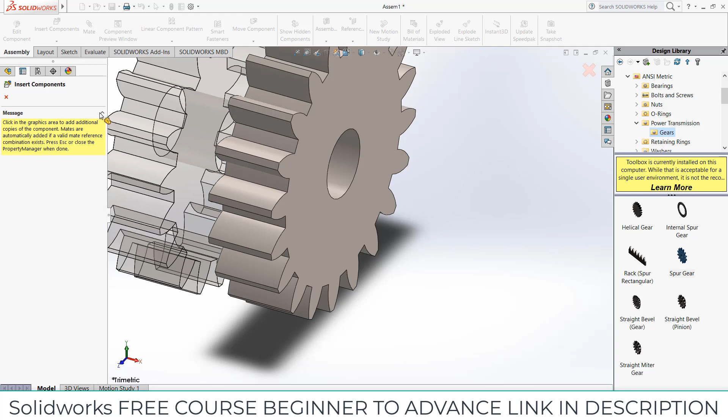Select this face, press Ctrl plus 8. Now go to sketch, click on convert entities. Select this line as well, click on convert entities. Now press Ctrl plus A, press Ctrl plus C to copy it.

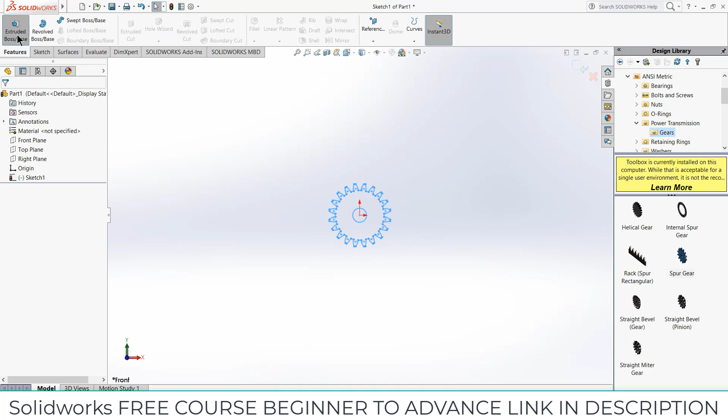Now click OK, go here, new part, OK. Select the front plane, click on sketch, press Ctrl plus V to paste the sketch. Now go to features, click on extrude mid plane. Now increase the distance as per your requirement. In my case, it is going to be 80mm.

Let's say 150 is much better. Click OK. Now press Ctrl plus S and save it as gear.

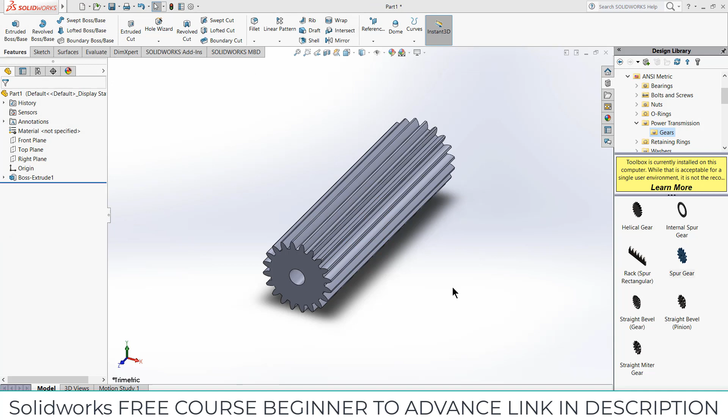A question might arise in your mind, why I'm not using this gear. The reason is that whenever I use it, mostly I ruin these libraries, so I don't want to ruin this library. That is the reason I'm not using it.

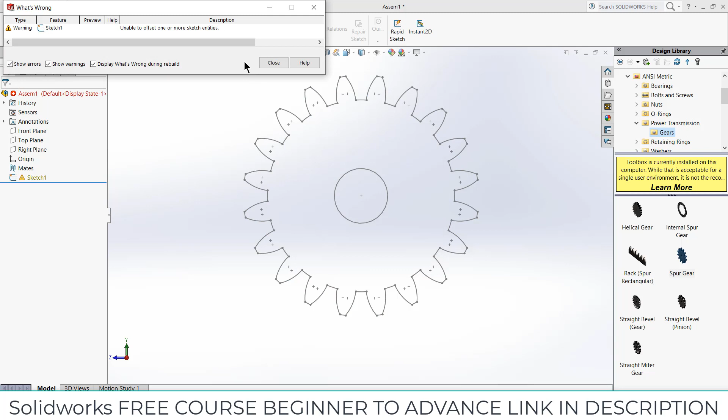So exit the sketch mode, right click on this, click on delete, yes, or close. Right click on this part, click yes, and close. Now similarly import the rack.

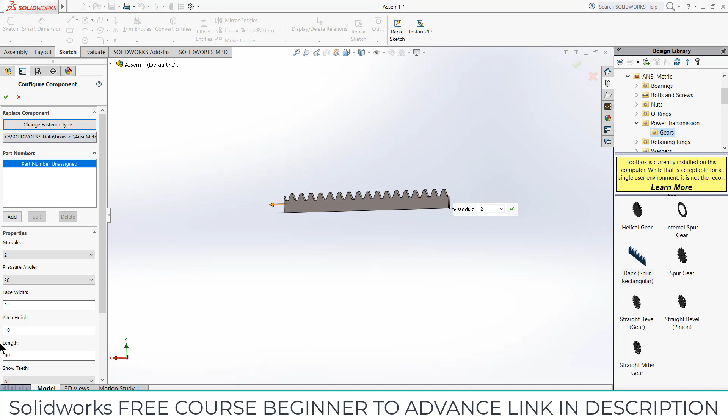Make sure that the module is 2 and its length is quite big. So let's first decrease its length. Basically I want it to 30, let's say 80mm, or 90mm is safe, fully safe for me.

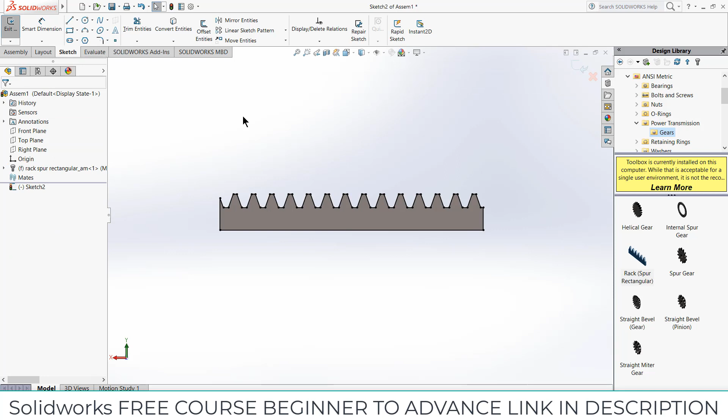Click OK. After that, first thing we have to do is select this face, press Ctrl plus 8, go to sketch, click on convert entities, select this face, click on convert entities, press Ctrl A, press Ctrl C, click yes.

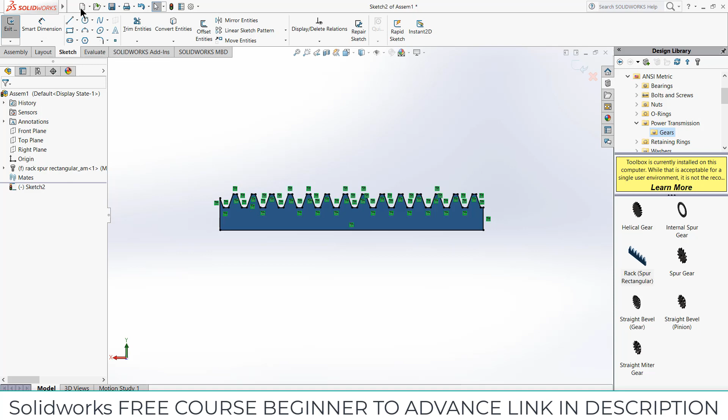And now click OK. Go to here, part, click OK. Select the front plane, click on sketch, press Ctrl plus V, go to features, extrude up to 10mm, click OK.

Now select this face, click on sketch, press Ctrl plus 8. We need to draw some two circles here, and the distance between them is 80mm.

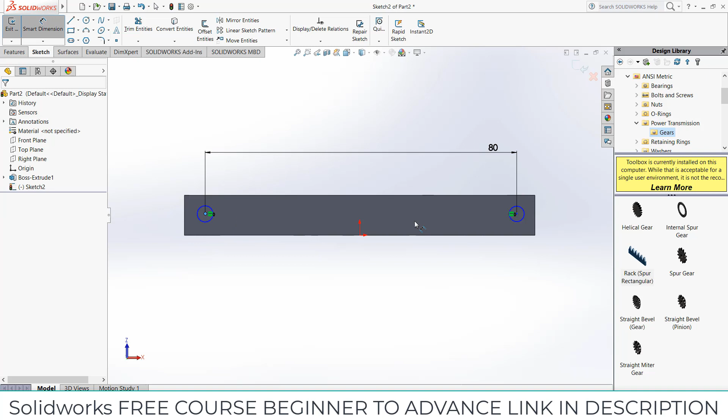Escape, select this circle and this point, click, make it horizontal, and escape. Basically what I want to do is 5mm, and from here to here it is 80mm.

And go to features, click on extrude boss base, give it thickness of 5mm, click OK.

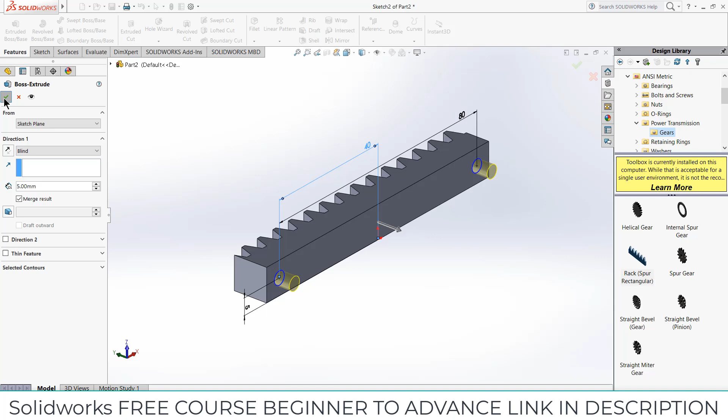Now press Ctrl S, save as rack. Sorry, no, rack 1 is better, I guess. So click here, go to assembly, exit the sketch and delete it. And similarly, right click on sketch and delete.

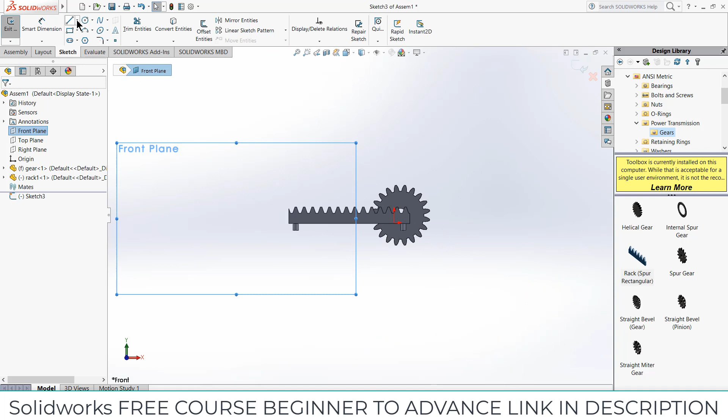Now I'm going to import these two parts. So click on insert components, gear and rack 1, import them. What I'm going to do is select the front plane, click on sketch, press Ctrl plus 8 for normal screen to the view. Draw this construction line.

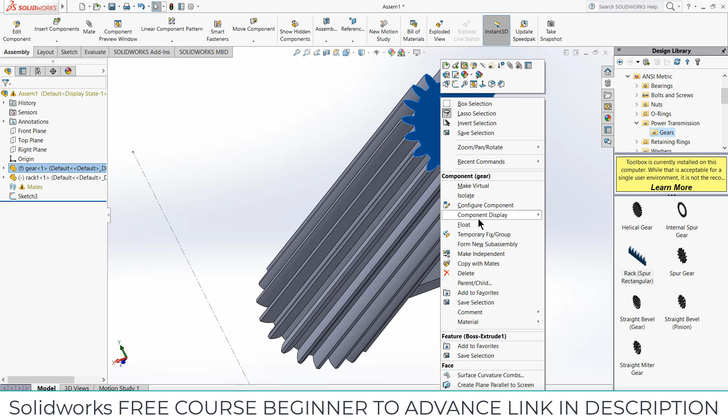Escape, and mates, delete this, select this and this. As you can see, an error pops up. The reason is that this part is fixed. So right click on it, click on float. After that, try this, select this and click OK, and select this face and the top plane, click OK.

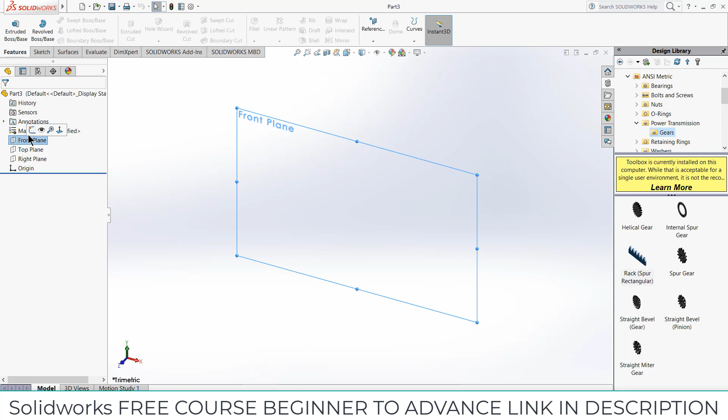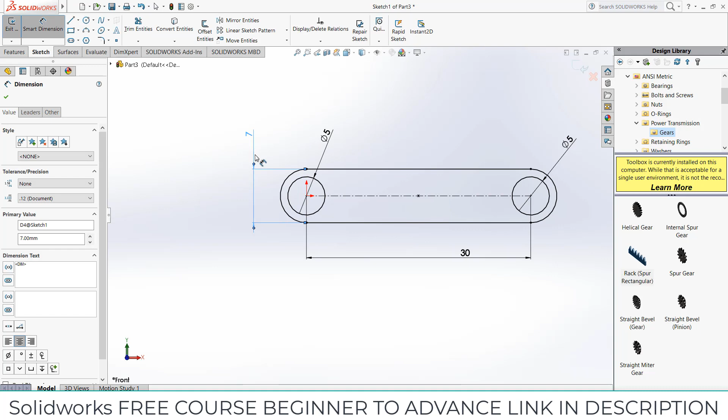After that, I have to make two more parts and our work is done. So let's see how we can approach it. So click here, click on part, click OK, select the front plane, click on sketch, click OK, press Ctrl S.

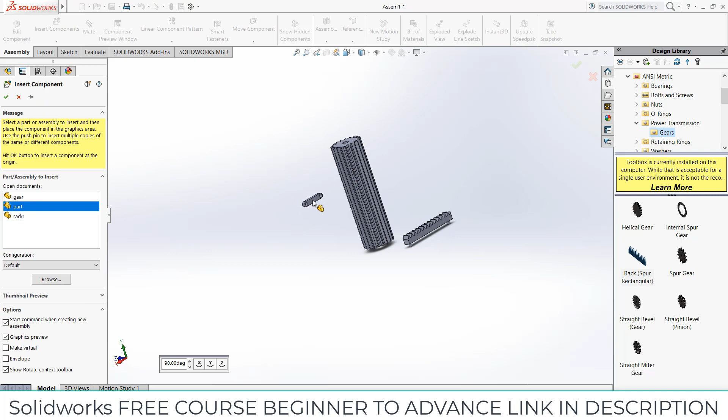Let's say part, I don't know what to call this part name. So go back to our assembly, insert components, part, and one thing we have to do is click on plane and plane. Select the top plane. Increase the distance to 90 divided by 2. It is 45mm. Click OK.

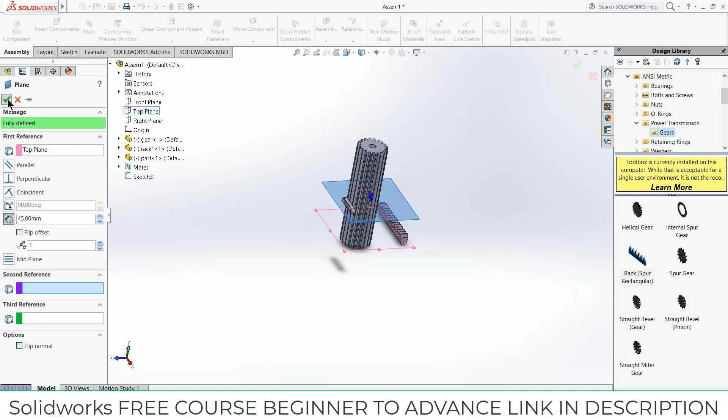Select this plane, click on sketch, press Ctrl plus 8. So we have to draw some lines like this, one more line, and give it dimensions. So this one is going to be 40mm.

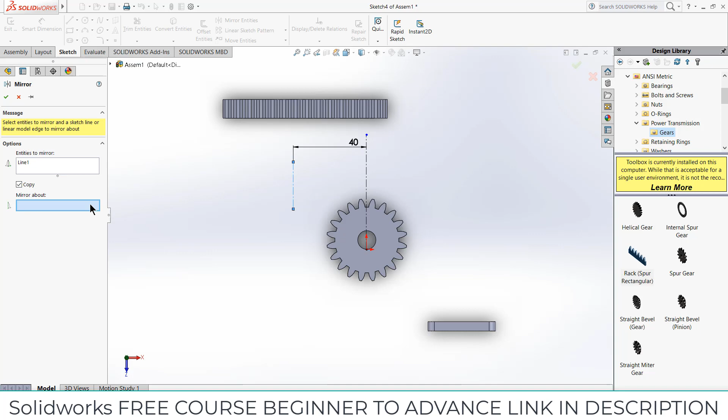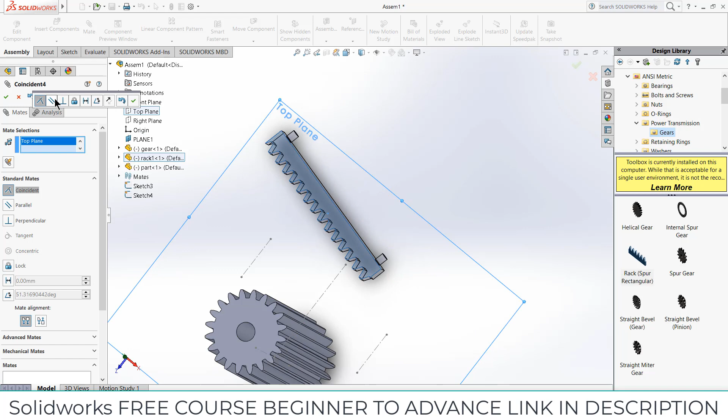And go to mirror entities, select this line, mirror about this line, click OK, exit. Rotate this part, click OK. Select this face, select the top plane, make it parallel to, click OK.

Similarly, select this face, select the front plane, make it parallel to, click OK. After that, select this and this, make it concentric, click OK.

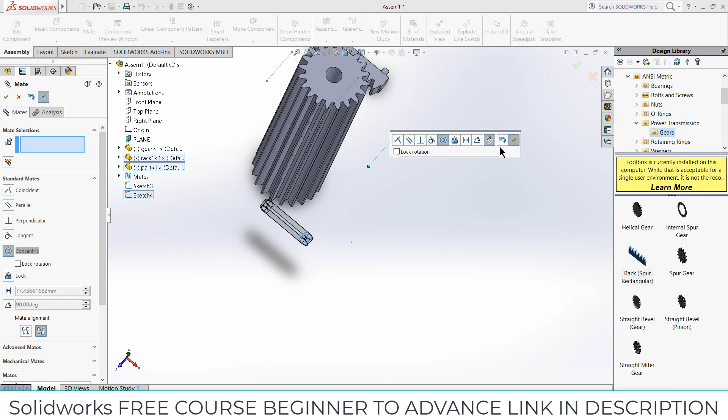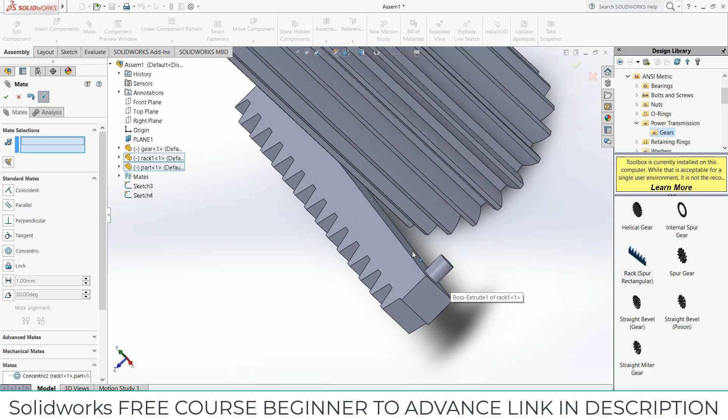Move backward and move this to here. And what you can do is mates, select this face and this face, make it concentric. Similarly, select this face and this face, make it concentric. Move it backward by pressing Ctrl and right click on mouse, drag this part.

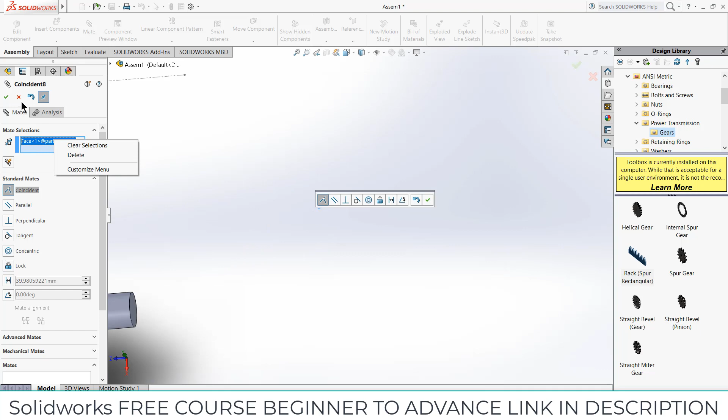And go to the mates. Select this. Sorry, delete, cancel this. Select this and mate, select this. Make it concentric. Sorry, my bad. Select this and this, make it concentric, click OK. Select this and this, make it concentric, click OK.

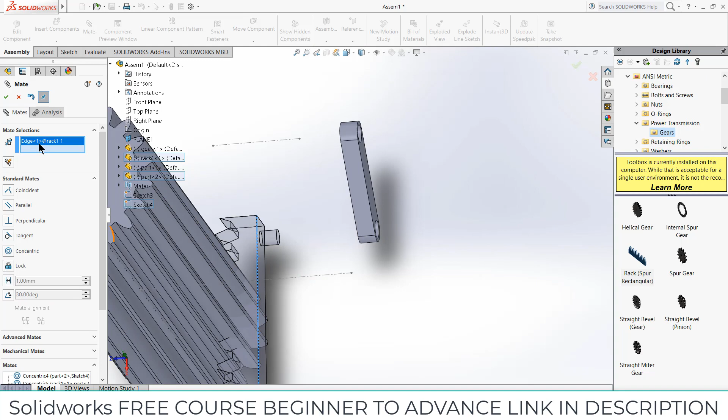Select this face and this face, click OK.

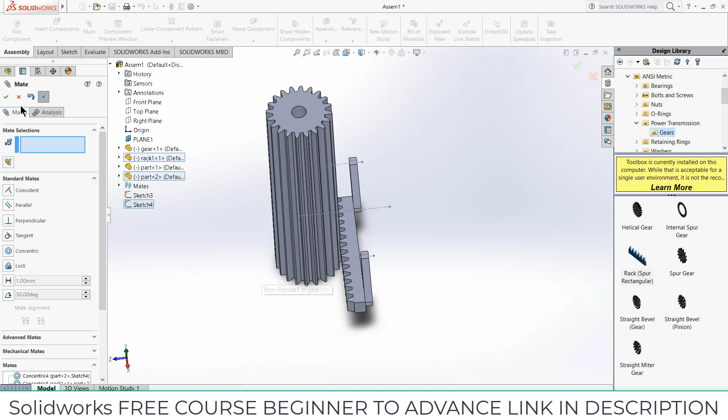Now most of the work is done. Now what is left is basically mating and making the correct distance from this to here. So what we can do is select this face, click on sketch, press Ctrl plus 8. Sorry, my bad. Select this part, click on edit components, click save and continue, save the name to mechanism.

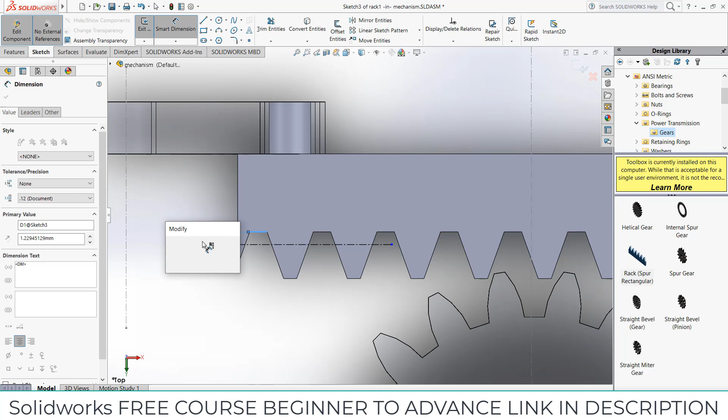And just what we are going to do is select this face, sketch, draw a line like this. Distance is 2.5mm. I already have covered this 2.5mm by something else in other videos, so you can check out.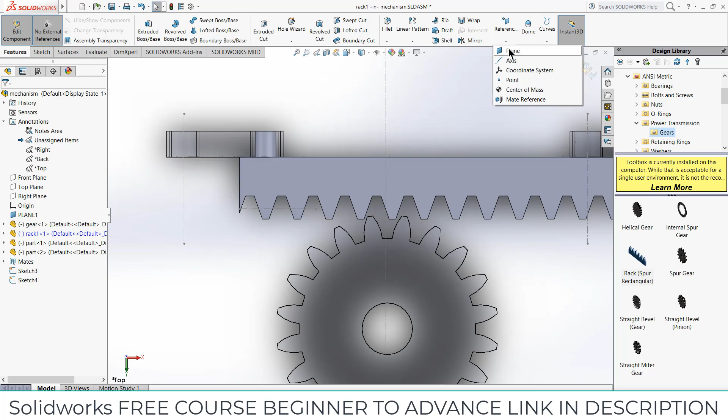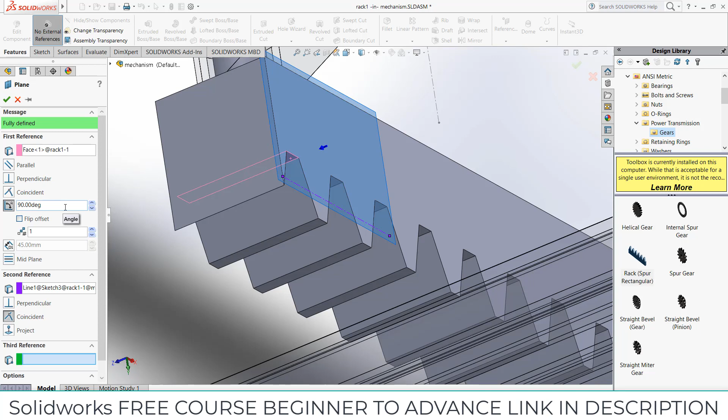Now let's get to this again. So now I have to define the mates. So what I can do is go to features, select reference plane, select this face, perpendicular. Okay, my bad. Now cancel it. Select reference plane. Select this face, inclined 90 degree. Click OK. Exit the sketch mode.

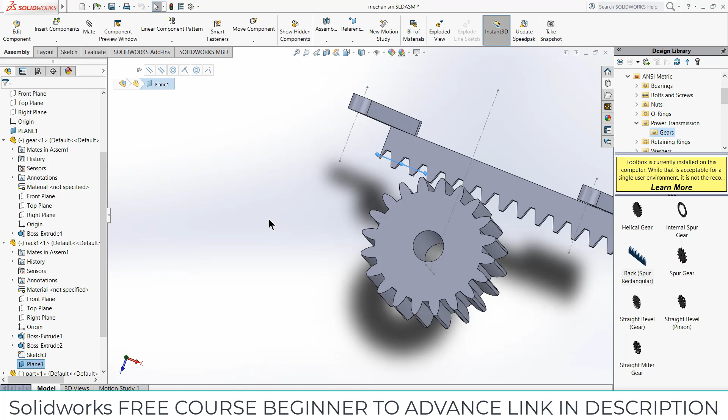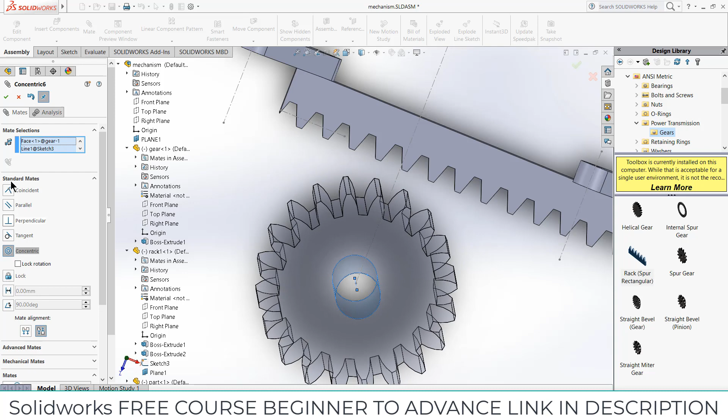This one is gear rack. Okay. So what we can do is, if you remember correctly, this gear has a module of 2 and number of teeth is 30. So 2 times 30 is 60. Okay. So basically what I have done is I have calculated the distance. So what I'm going to do is select this plane, select the, okay, here's one problem. Select this gear, go to this mate, select this mate, click on here, make sure it is concentric. It is a very important thing, else my calculation will not work.

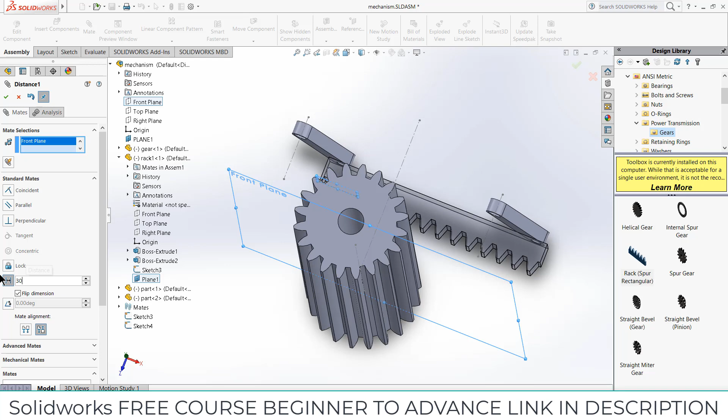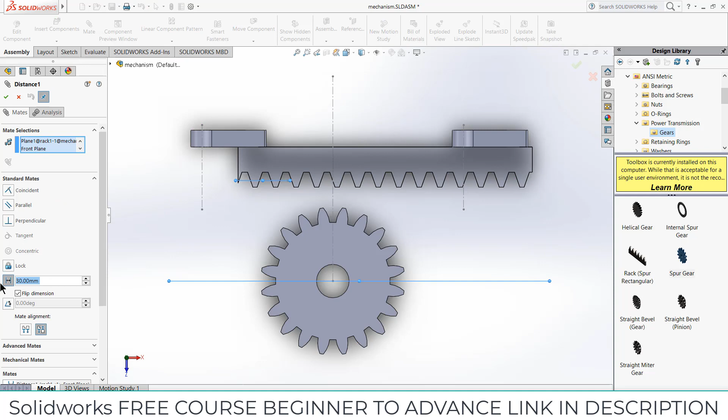So what we can do is now we can use mates. Go to advanced mates, mechanical mates. Click on rack and pinion. Select the rack first. Select this face, and here's the pinion. Now, if you notice correctly, the pinion pitch diameter is 1. So make sure that your pinion pitch diameter is always correct. In my case, it is 40 because module is 2 and the number of teeth is 20. So 2 into 20, it is 40. Okay, and here you can see it rotates. The reason of rotation is because of the pitch circle.

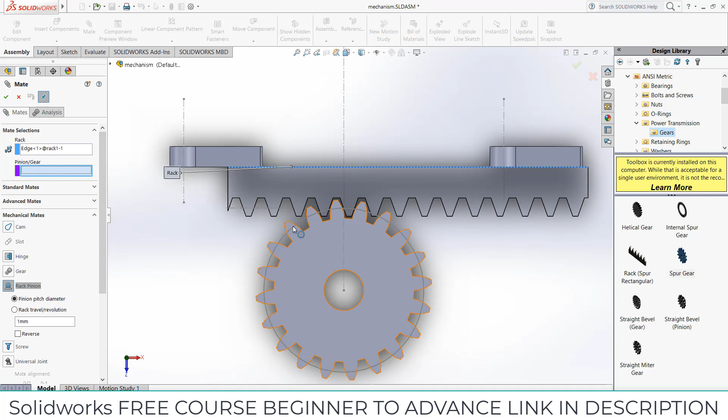If you don't want the rotation, what you can do is select this gear, click on edit components, select the top face, click on sketch, draw a circle like this of diameter 40 mm, exit the sketch and exit the edit assembly component mode. Now go to the mates. Now go to the mechanical mates, rack and pinion, select the rack edge and select this. So as you can see, it is not rotating now. Click OK. So if I try to rotate this, you can see the animation now.

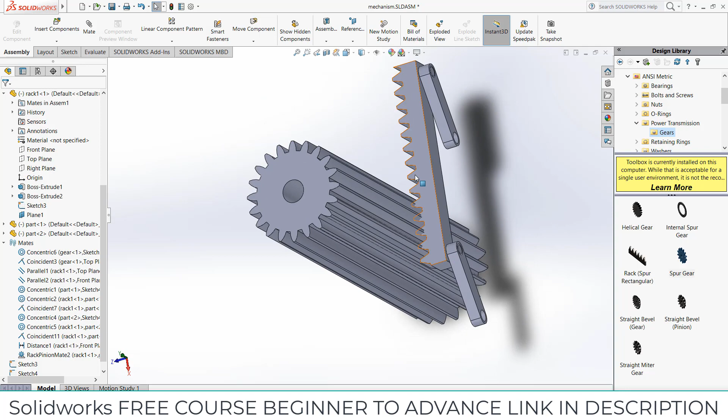Some people say, hey man, these lines are quite odd and you don't like it. Simply go here and click on hide sketches. Remember, I have told everything about these in the course, and if you look closely, they are interfering. So right click on it, click here. I guess it's reversed. Yeah, it's reversed. Okay, click OK. So I can see it's working now.

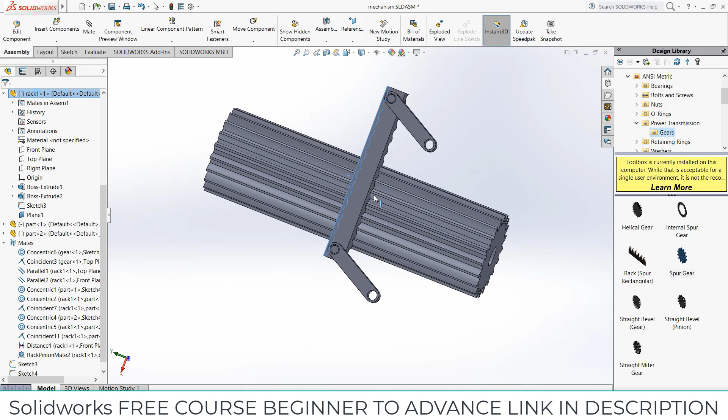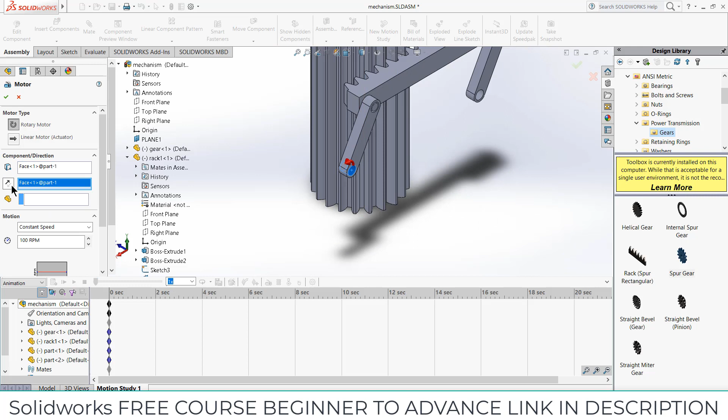So the last part left is the animation part. So select a view first. I guess this view looks great. Now what we can do is go to the motion study, click on motor, select a face. Sorry, I accidentally selected the spring. Select this face, click on reverse direction, enter the value of 20 rpm, click OK, and click calculate. So as you can see, our gear animation now looks quite sloppy and slow. Most people don't like it. At least I don't like it at all. So increase the fps, click on calculate.